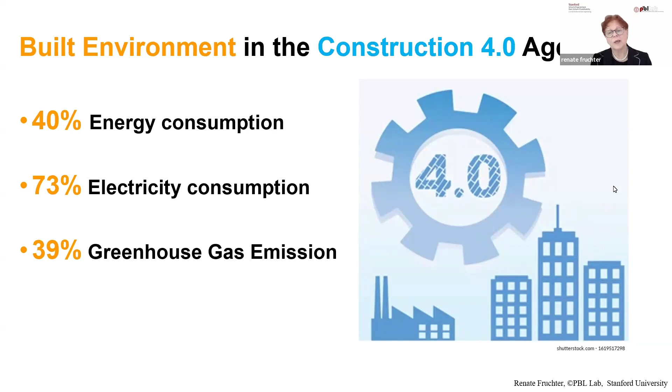Addressing in their projects the current climate emergency, coined Code Red for Humanity by the UN Secretary General, as well as reflect in their projects our AEC industry's responsibility to adopt innovative construction 4.0 processes, digitalization, industrialization, prefabrication, and new materials to build more sustainable buildings for current and future generations.

So, to address these challenges, students responded to this year's theme, Generative Minds for a Better World: AI, enhanced collaboration, and high-performance buildings.

These were supported by 3 specific competition topics. The 90s Sustainability Challenge focused on time and urgency to define their sustainability impact in a temporal dimension. The IPD Challenge focused on cultivating a team mindset in support of productivity in the age of construction 4.0, coined T-Mind. And last but not least, the Technology Challenge, inviting the students to connect the dots between innovative technologies, processes, and the buildings that people actually go to work and learn, focusing on sustainable, intelligent supply chain.

So this year, we gathered at this annual PBL event to listen to the 3 AEC Global student teams share their projects and team process, and discuss with industry mentors their solutions. So, without any further delay, Pacific team, the floor is yours. Okay.

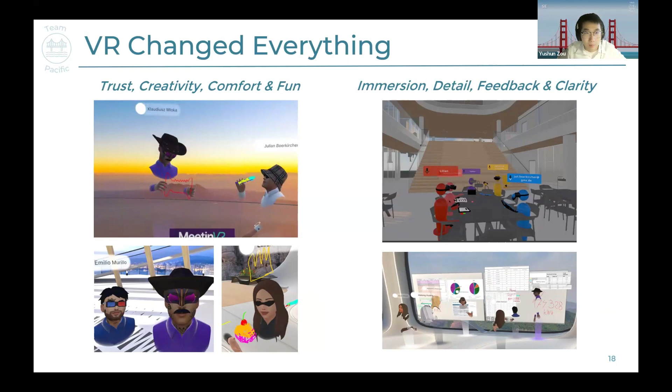At the same time, VR gave us shared spatial understanding. We weren't looking at disconnected screens, but we were inside the building together, catching issues early, testing ideas at full scale, and making decisions with clarity. VR didn't just help us see the project, it helped us see it as a team.

Now we come to our project goals, which are the key intentions that guided our approach right from the start. First, we want to reduce resource use and meet the sustainable target values across all relevant categories. And we aim to create a flexible and future adaptable building ready for changing needs and digital systems.

We also want to minimize our site footprint and maximize prefabrication to streamline the building process. And we intend to design a building that keeps operating costs low and remains resilient over time. And finally, we aim to deliver a space that supports well-being, daylight access, and intuitive, inclusive use.

Our challenges intersect in different ways, but at the center, they come together in a unified approach that is collaborative, tech-powered, and built for long-term impact.

For the IPD challenge, what is really holding our team back? In interdisciplinary projects, teams always face challenges that slow them down. Silos, delays, and poor coordination often block the path to smarter solutions. We have identified 4 major challenges that affect our team progress. To overcome them, we have set clear goals with well-designed approaches.

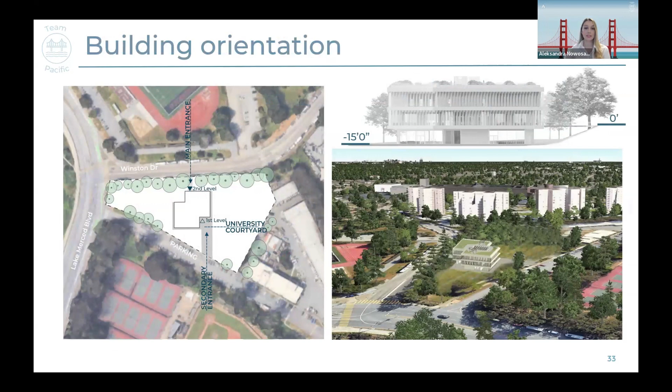The positioning of the building on our site was carefully chosen based on existing conditions, including both climate and topography. This placement creates a comfortable courtyard space for users and allows for dual access, a main entrance from Winston Drive and a secondary entrance from N State Drive and the adjacent parking area.

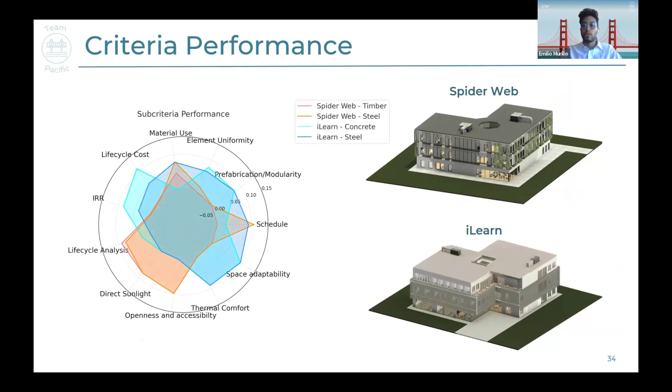The big idea you will see today didn't appear out of nowhere. We started with two different concepts, each with two different structural systems. We evaluated each of these alternatives to understand their performance in 11 different sub-criteria, and you are about to see the evolution of the one that narrowly beat the rest.

iLearn is more than just a name. It's a mindset. Every I behind it reflects what this building is built for. But all of this boils down to three core ideas that shape iLearn from the ground up: user-centered design, because the people in the building shape how it works and not the other way around; flexibility for the future, to create a structure that evolves with learning methods and not expires with them; and embedded intelligence, where technology isn't an add-on, but part of the system.

Our starting point was a moment of redefinition. When we thought about that word, the launch of the iPhone in 2007 came to our minds, not just for its technology, but for how it changed behavior. The idea of putting users first and embracing adaptability is what inspired us to create iLearn.

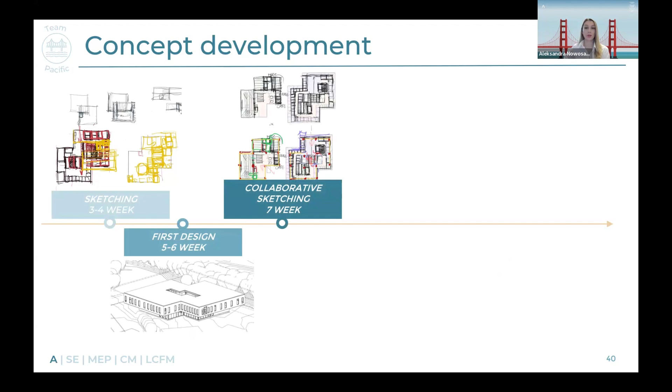We began exploring a double diamond footprint using sketches and focused deeply on user needs. Soon after, we presented our initial design and spent the following weeks developing it through cross-disciplinary collaboration. During the winter presentation, we committed to the iLearn concept. However, we felt the design didn't yet reflect the full potential of its name, so we undertook a complete redefinition, rethinking every element. And today, we're proud to present the true iLearn building.

We decided to indicate our crucial design values for the university building that reflects the iLearn big idea: interaction, collaboration, and creativity are the three assets that function together to increase the potential of its users, complementing each other and creating a space conducive to the development of users, human relations, and their well-being.

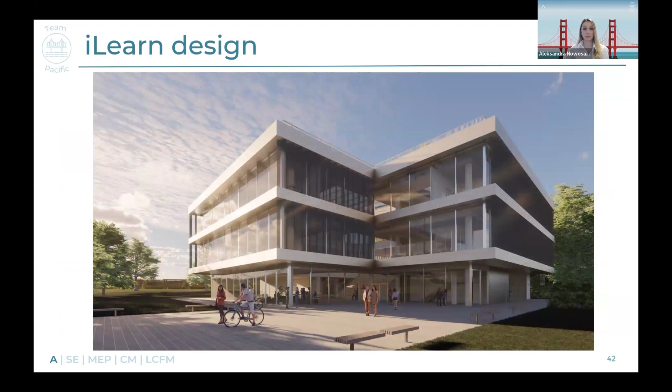The iLearn building is designed with a focus on simplicity and clarity, featuring glazed facades and smooth neutral cladding. Its open character is emphasized through a structural layout that enables adaptable spaces and spacious interiors, promoting flexibility of use.

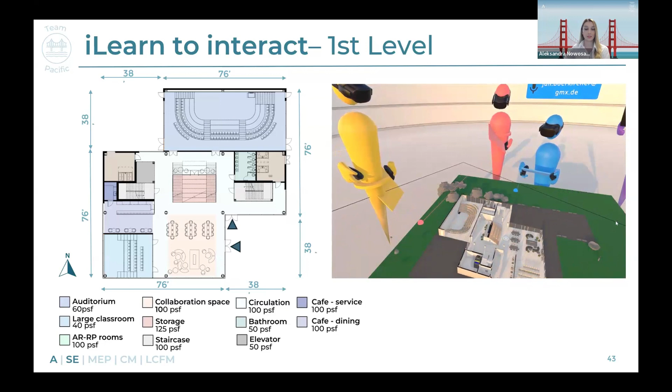We begin with the ground floor, which is designed to encourage interaction and connectivity. It offers comfortable leisure areas, creating an inviting environment for users to relax, socialize, and collaborate.

The specified load is the live load provided from the table in ASCE 7. From a perspective of structural efficiency, we collaborated with architecture to put higher live load areas around the columns.

The red rectangular box points out the location of retaining walls, which are covered around the excavation slope in both the big classroom and auditorium. The image at right shows the location of retaining walls in the context of the site.

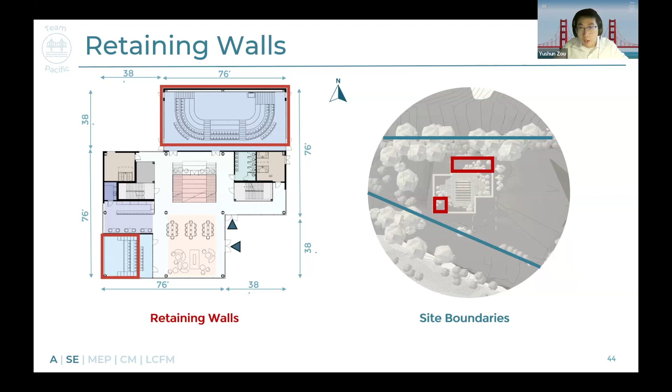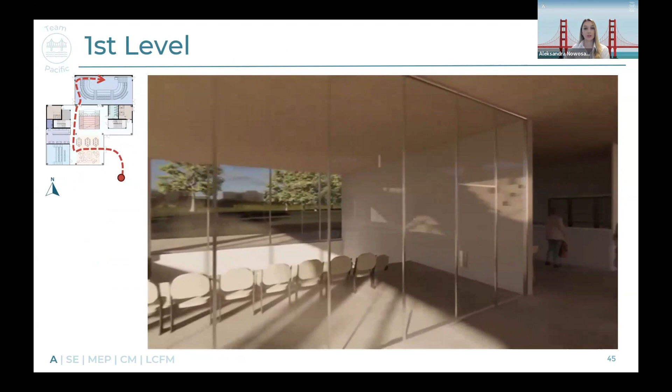We enter the first level from the courtyard, stepping directly into the heart of the building, a vibrant social hub centered around the main staircase, with a designated sitting area that encourages student collaboration. Straight ahead, there is a large glazed classroom with sloped seating and a cafe just nearby.

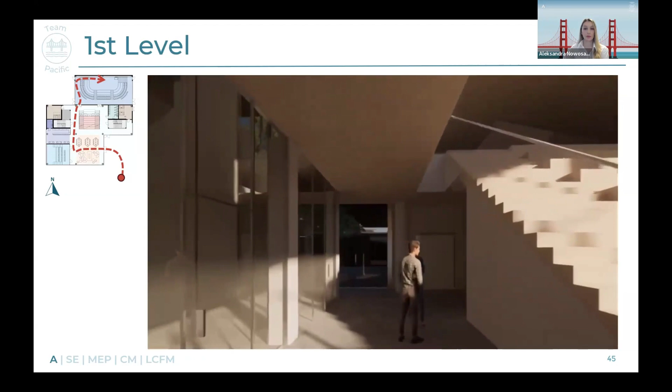As we move past the social area, we pass by the elevator on the left, and we move to the auditorium, designed with a curved audience layout and 4 exits to ensure smooth circulation and safety during emergencies.

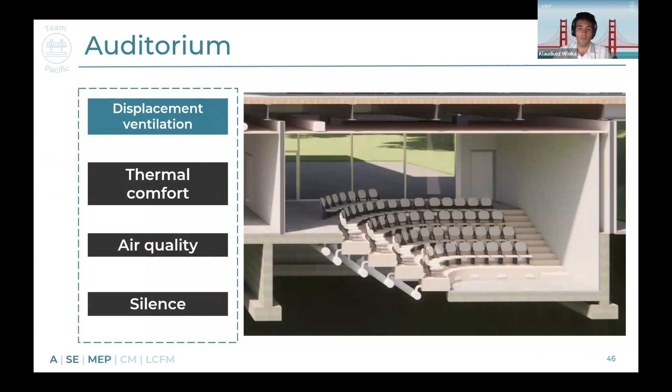The auditorium has a specific structure and performance needs. By using displacement ventilation, we ensure the best possible condition for users, making the space perfectly suited for its purpose.

Entering the second floor is designed to foster collaboration, offering diverse spaces and flexible learning environments that support the future of education. For the second and third floor, we put regions with low load like classroom and office around the cantilever part, which can help reduce overall element size.

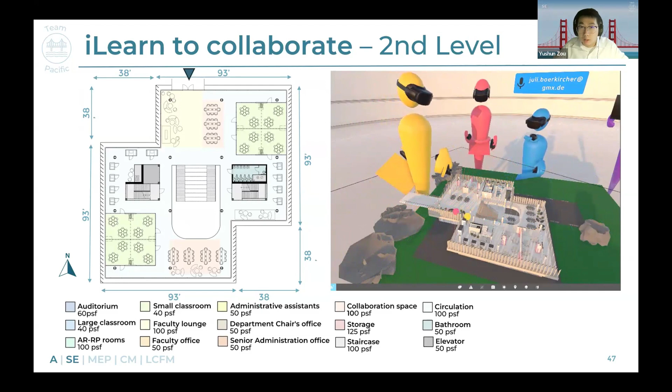Entering the second floor from the higher northern street, we arrive in a welcoming lunch area that connects to the collaborative spaces. To the left, there are classrooms, and as we move past, we reach the top of the main staircase. We're greeted by natural light and open views.

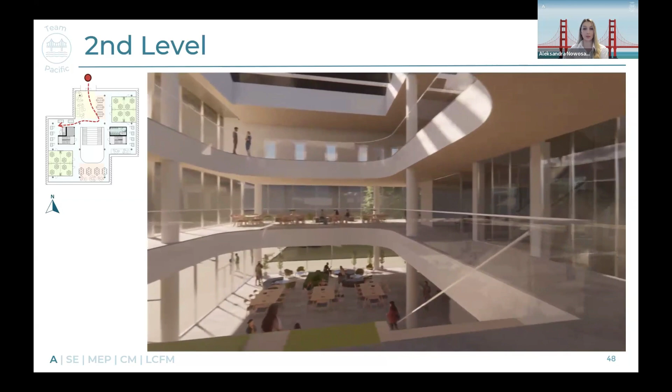Turning right, we reach the AI pods area, personalized spaces supporting individual learning. Inspired by modular meeting rooms, our AI pods offer pockets of privacy in a collaborative environment and come equipped with AI-driven screens and assistive touch.

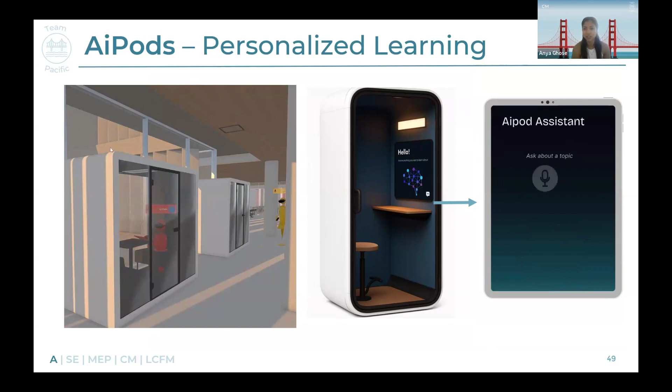Whether it's a foreign student looking to learn in their native language or someone diving deep into a discipline-specific topic, the AI delivers tailored content in real time. And with ambient lighting and customizable sound, it's not just smart, it's an experience. Personalized, private, and intuitive. You never want to leave.

Continuing our journey on the second floor, we pass the fully glazed staircase offering views across the building. We then arrive at the bright central atrium, where collaborative spaces open up to the right. Moving forward, we reach the second classroom, designed to reach various learning goals.

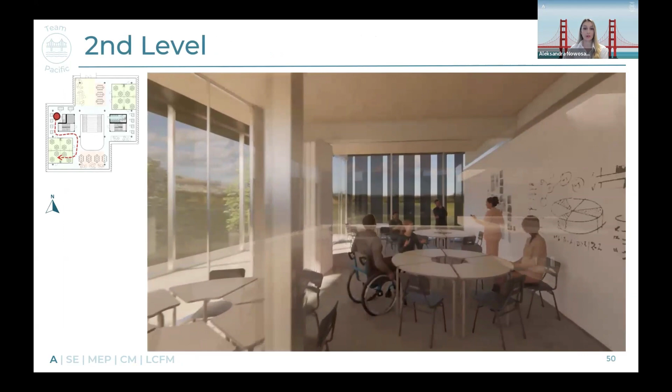Focusing on the flexibility of our spaces, we designed the classroom that can be adjusted to the user needs by changing its arrangement. One spacious classroom can be divided into two smaller ones or into 4 seminar rooms. All spaces allow for comfortable use due to the glazed partitions providing natural lighting, as well as separate entrances for all of the segments.

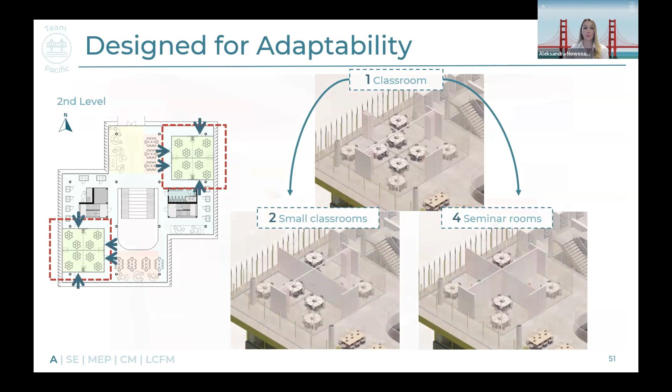By providing movable spaces, we allow users to decide on the organization of the educational building, basing on their current needs and learning goals.

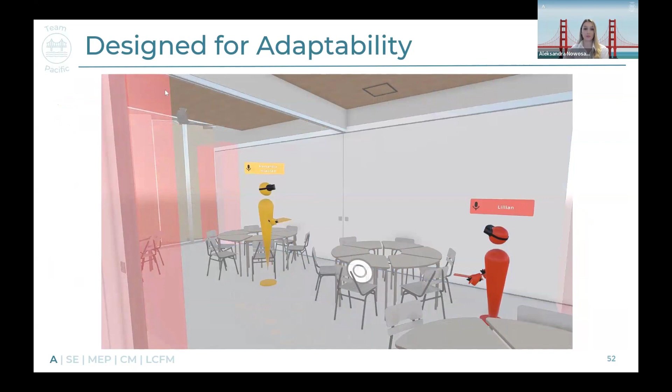Adaptability provides comfort which might be disturbed by noisy surroundings. To address this issue, we selected materials with excellent sound-reducing properties, acoustic glass for the glazed partitions, and MDF panels for soundproof ceilings. Ease of maintenance was another priority, leading us to choose high-performance wall paint that allows for bright, easy-to-clean surfaces. The color palette creates a cozy, calming atmosphere, serving as a perfect backdrop to university life.

The third floor supports creativity with fully equipped project rooms, as well as offices in the opposite part of the building that aren't tied up to any specific user group and can be adapted to changing needs.

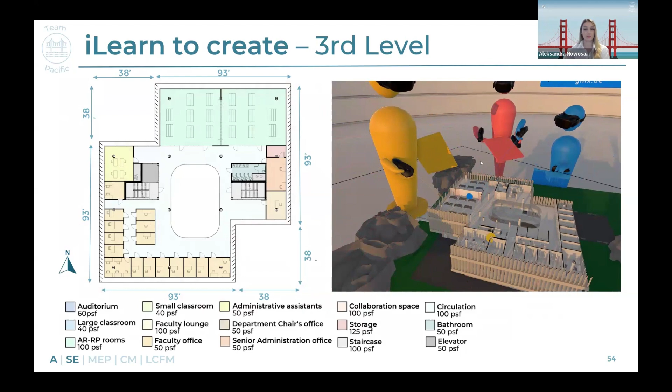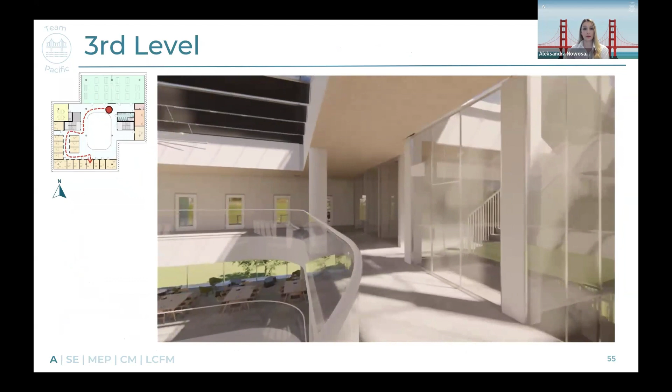We pass by the AR-RP rooms, spaces designed to bring student vision and creativity to life. Walking along the central atrium, we arrive at the offices, located along the eastern and southern wall.

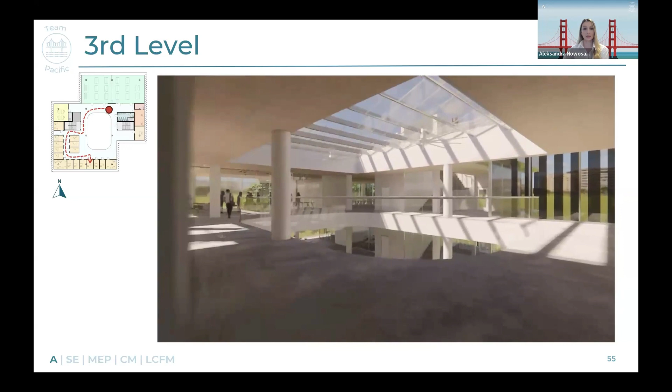As we move forward and turn left, we return to the atrium, once again immersed in the natural light streaming through the large skylight above, and we finish our trip in one of our offices.

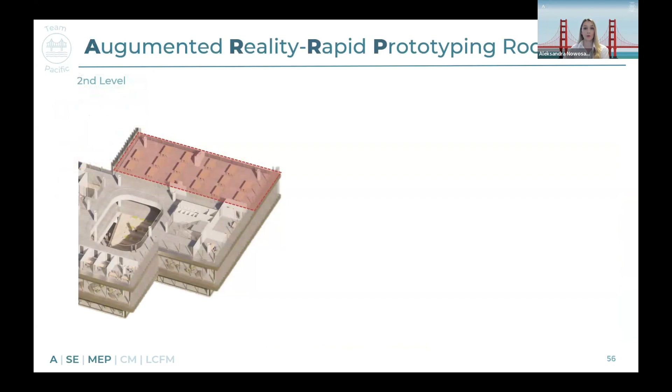We rebranded our instructional labs as augmented reality rapid prototyping rooms to highlight the importance of creativity, innovation, and future-focused learning. The space is designed to support every stage of development.

It begins with an area for brainstorming and sketching, followed by stations for digital prototyping, and at the center, a dedicated zone equipped for augmented reality.

These rooms also require a special ventilation approach, so we use operable windows, air exchange rates, and HEPA filters to ensure excellent air quality there.

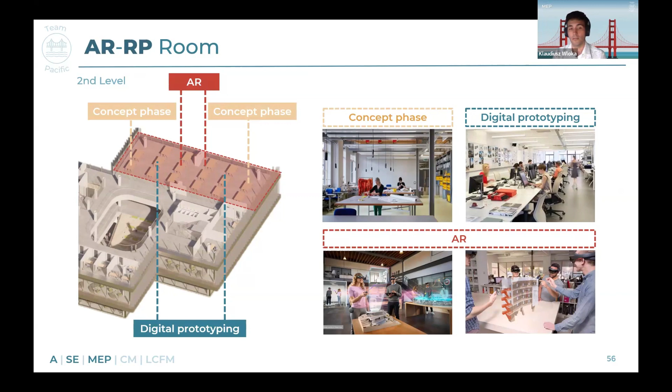And now that we've covered everything inside the building, we move to our final floor, the rooftop. Even though we designed a highly technical, smart building, we still wanted to create a space that reconnects people with nature, sort of a green oasis in the middle of the city.

Therefore, the rooftop is divided into several areas. One is the community garden, where fruits and vegetables can be grown together. Another is the biodiversity zone, with insect hotels and native plants, which is helping us to strengthen and restore the local ecosystem.

We also created a social area where students and faculty can relax, meet, or even host small events, turning the roof into a welcoming and engaging space.

Right next to it, we integrated hydro panels, which extract clean drinking water directly from air using solar energy, showcasing smart technology that provides a sustainable source of fresh water. This combination of spaces on the roof supports both environmental and social sustainability, making the roof a vibrant, functional, and nature-friendly extension of the building.

The community garden is not just a space for endorsing biodiversity, but a space for busy engineering students to come together in an outdoor community building space. By taking advantage of San Francisco's mild year-round climate, we're planting seasonal fruits and vegetables to create a roof-to-cafe system, serving the produce in-house and generating a revenue potential of $15,000 per annum. Our LCFM does love that.

As user-centered design is one of our main goals, we aim for providing smooth circulation throughout the building. Unfortunately, some problems did still appear.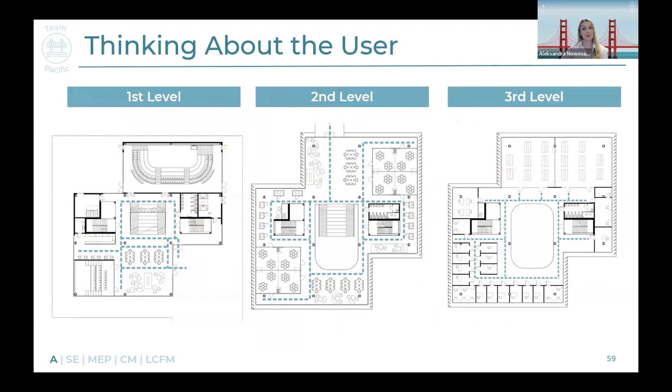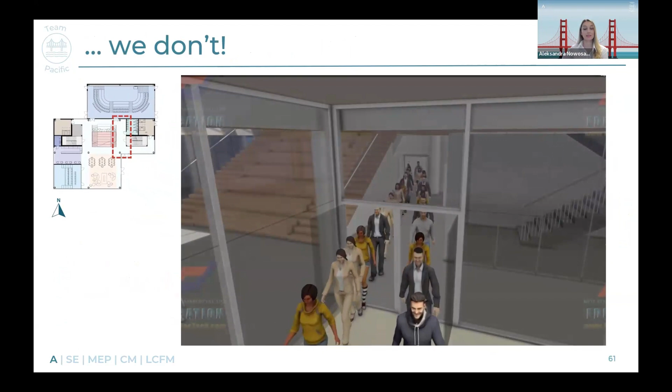The first issue emerged in the corridor running between the auditorium and the entrance from the courtyard. It seemed too narrow in case of an emergency. Luckily, we managed to analyze the issue by running a simulation in Pathfinder, and it came out that the space is wide enough in case of an emergency situation.

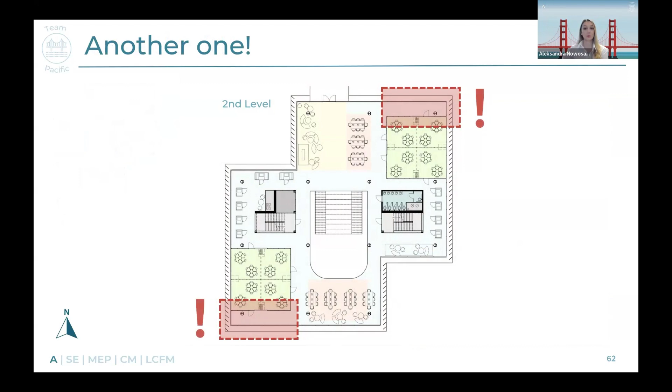The next problem was noticed in the corridors leading to the corner seminar rooms that are created when the movable partitions are closed. But also in this case, Pathfinder allowed us to simulate the problematic situation and make sure we provide a comfortable space for moving around.

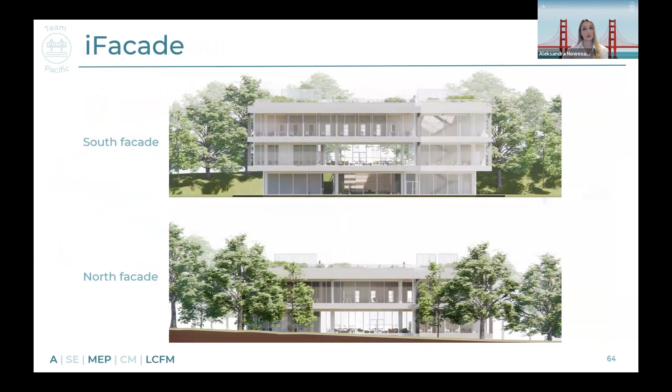We designed our north and south facade with large glazings, which provide light and create a seamless transition between the building's exterior and interior, enhancing the overall experience of openness and flow.

Glass buildings are a visual statement. They are truly stunning and give users a unique sense of openness, connection to the outside, and natural light. But they also come with challenges, like solar heat gains and the risk of glare.

To make our building comfortable and usable, we implemented a daylight control system combining low emission glass, which reduces incoming light and heat, with external shading that limits direct sunlight.

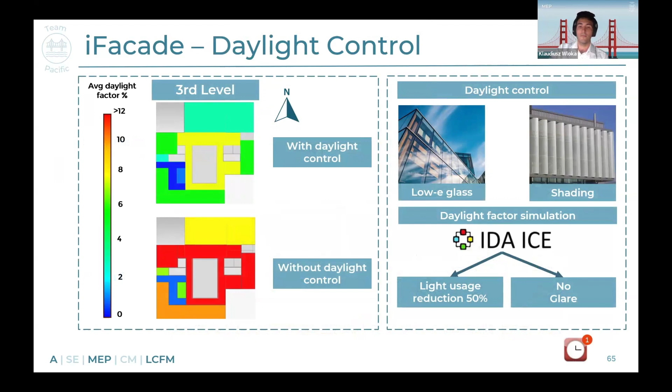With that much glass, it was clear that we needed external shading. So we ran a trade-off analysis between two facade options, a kinetic system and vertical shading fins. We ultimately chose the vertical shading fins because they come with lower and more predictable costs, a long lifespan, and they're corrosion resistant, which is especially important in San Francisco's foggy climate. Overall, they turned out to be the most cost-efficient and robust solution.

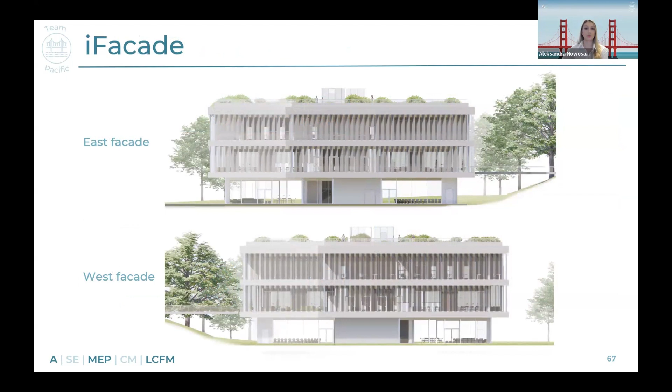All of our facades show the joint efforts of architect, MEP, and LCFM in providing an aesthetic look, as well as at the same time user comfort.

With such a large glass surface, cleaning costs became a major consideration for us. That's why we developed a fully automated system using cleaning robots, both for floors and facades. On top of that, we equipped our windows with a self-cleaning coating. Altogether, the setup allowed us to reduce cleaning costs by up to 60% compared to traditional methods.

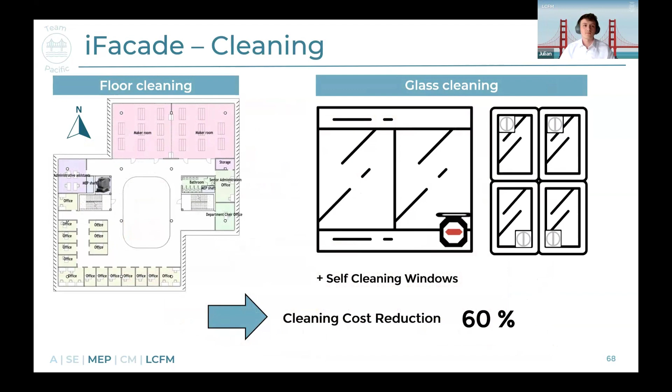Direct sunlight turned out to be a more complex problem than expected. So in addition to our previously mentioned shading strategies, we also added shading elements in the atrium. In the end, we created a space that feels open and welcoming while adapting to the natural circadian rhythm, with natural lighting that changes color based on outdoor conditions, working with the rhythm of the people inside.

We designed a natural ventilation system for the corridors using openable windows in the central atrium, which operates based on the stack effect to drive vertical airflow. Large HVLS fans support air movement throughout the building, while makerspaces are additionally operated by cross-ventilation.

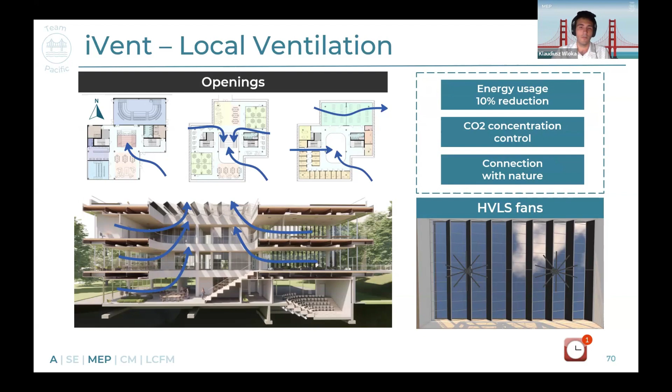The system is controlled by sensors that determine when natural ventilation is effective. This ensures energy usage reduction and improvement of user comfort.

Continuing with the fan strategy, we also use ceiling fans to reduce cooling energy use by 33% while improving the comfort of users inside. By combining the previously mentioned elements, we developed a hybrid ventilation system based on a VAV setup with air handling units equipped with heat recovery and integrated air source heat pumps, providing both heating and cooling. To ensure high indoor air quality, the system is also equipped with HEPA filters. This solution balances energy efficiency, comfort, and health.

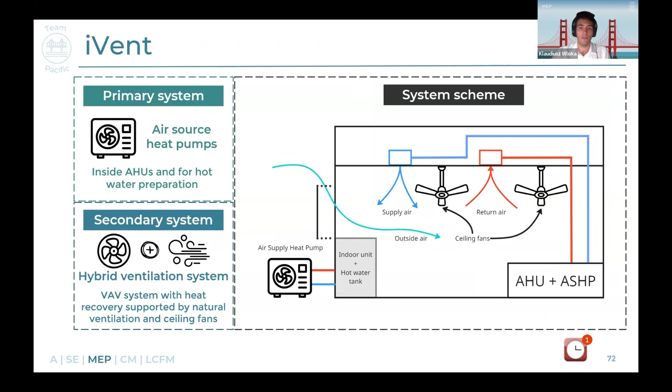The ventilation system was designed to adapt to flexible classroom layouts, ensuring comfort regardless of interior changes. We also provided targeted airflow to the areas with the AI pods, and by dividing the system into two zones, we reduced the duct sizes without interfering with the structural design.

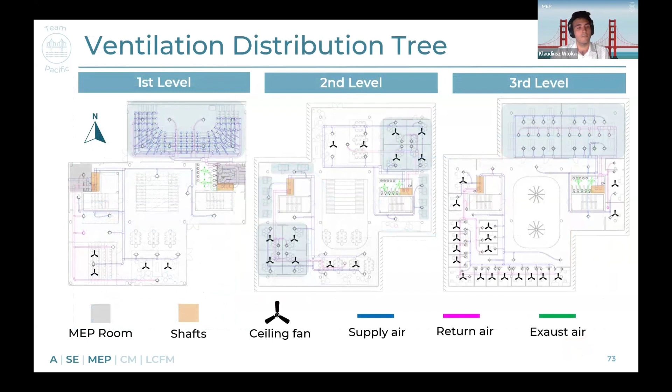To support adaptability of the rest of the floor plan, we have designed a large modular structural grid of 38 feet, which gives us maximum flexibility for different layouts and uses.

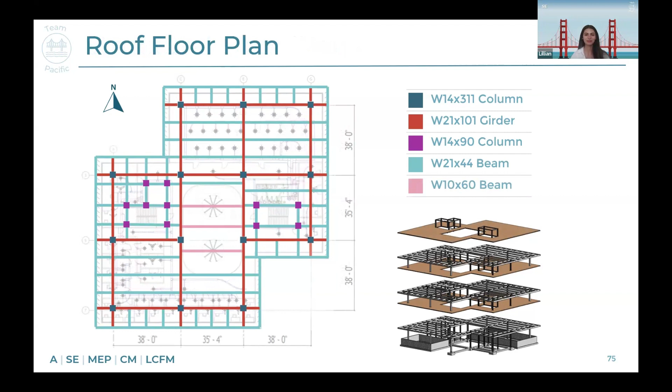In terms of gravity load path, the loads are transferred from each floor to girders and through the columns down to the foundation and the ground.

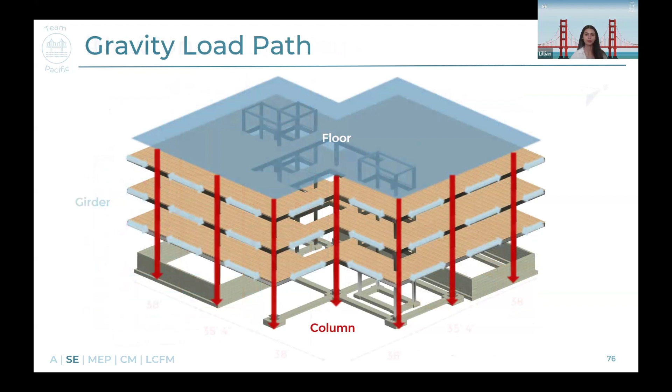Now, through collaboration with the team, we decided to use steel as our frame material so that we could have these long spans that give us openness and adaptability with small cantilevers. Steel was also a good choice for us in terms of prefabrication and the construction schedule. Its high strength to weight ratio also meant that we could work with slimmer sections, leaving good space for MEP and architecture.

So we were able to achieve a comfortable floor to ceiling height of 11 feet 2 inches, with MEP being 1 foot 4 and the structure being 2 foot 6.

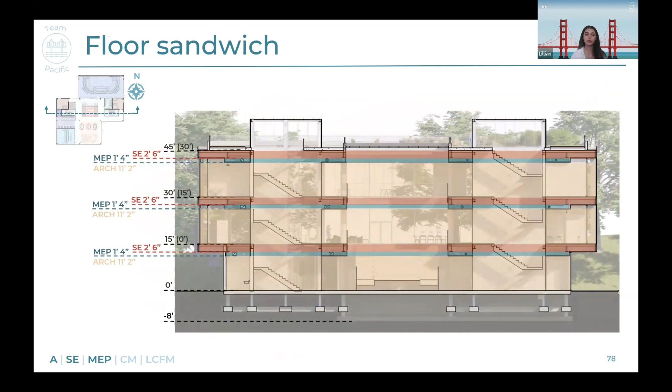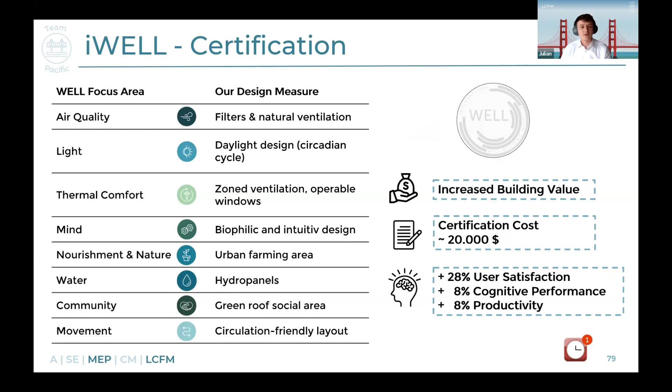Now, to make all of these intangible aspects of comfort and well-being that our design team worked hard on measurable, we decided to go for the WELL certification. It captures the impact of features like our circulation-friendly layout, fresh air systems, daylight optimization, and even the urban farming. These contribute to better health, higher user satisfaction, and ultimately add value to our building.

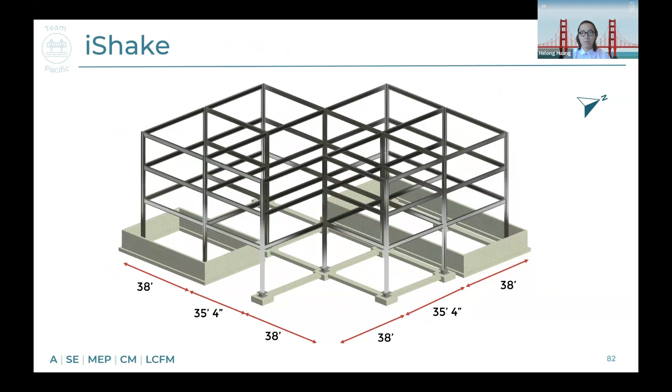Here's our foundation system. We use big concrete rectangular footings on the large columns and smaller footings on the small columns, which were set around 2 cores. All foundation beams are 36 by 18 inches concrete rectangular beams.

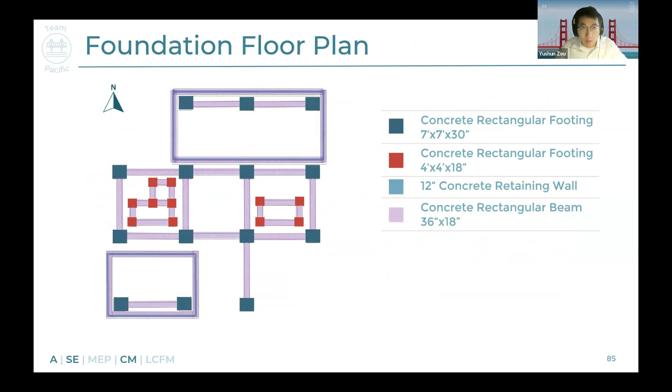Using bolted web-welded flange for beam-to-beam connections can reduce field welding, which can reduce labor costs and communication issues due to weather or access.

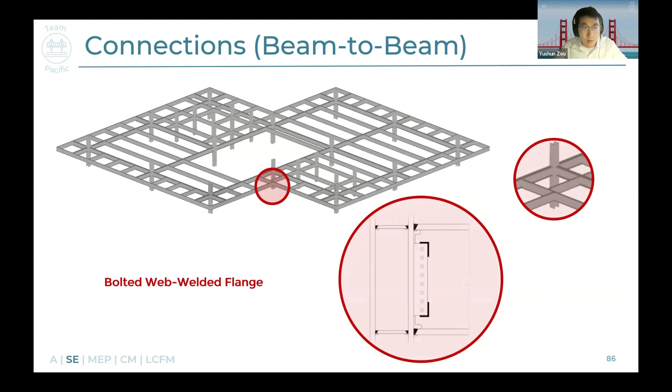After the earthquake, the seismic force only makes the fuse yield, without cost for repairing beams and columns during the life cycle.

Here are the first three modes of response of the structural system, which are translation in the x-axis and y-axis respectively for the first and second modes, and torsion for the third mode. This is a good sign for a well-balanced lateral force resisting system. The maximum inter-story drift ratio is about 1.5%, which is smaller than the requirement of 2% specified in the code. Both measurements show the effectiveness of the designed lateral system of the building.

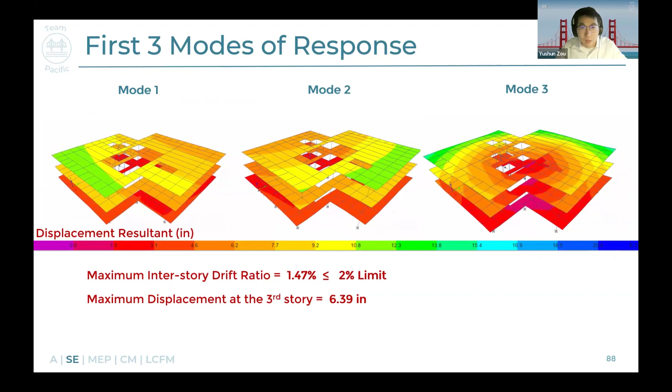Now let's see how we developed our own disruptive AI solutions to fulfill the approach for our team mindset. Having identified design feedback latency and lack of understandability created by the silos, we created a multi-agent system to handle quantity takeoffs, cost estimation, and target checking. With insights from the team about our information needs and requirements, we broke down the process into smaller tasks that single agents can handle by coordinating with each other.

These agents were given a variety of tools and capabilities to fulfill their role in the system, including data processing tools, information retrieval abilities, and memory management. For example, one step in the cost estimation process is scanning for new items that haven't been seen in previous design iterations and matching them to items from a cost database built with RS Means. Beyond just a tool for automation, this system is flexible, can self-correct when running into errors, and makes the workflow very explainable to other disciplines not acquainted with these processes.

Just to show a demo of what we're working with, we first make a request to the system using natural language. For example, we can say, hey, could you please perform a quantity takeoff cost estimation and check the targets for the latest BIM models?

Following this, the system will process these files to produce quantity takeoffs and cost estimates in an observable way, where we can verify and check their work. Here, we become checkers rather than doers, and the whole process becomes understandable and accessible to all disciplines.

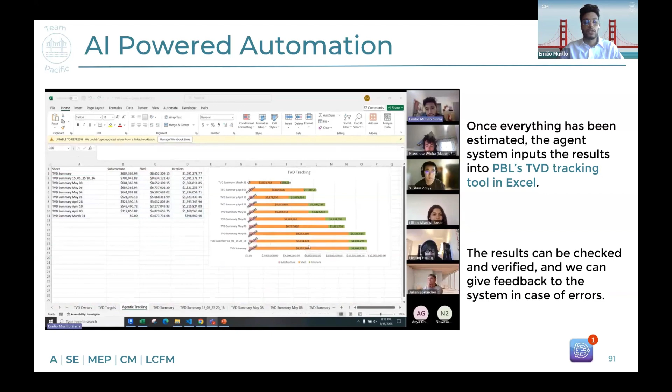The system has already helped us a lot in making the tracking of target values and new iterations smoother and easier to understand. The frequency of how often we get feedback on our design went from once a week per milestone to now anytime we want.

Now looking at how our other TVD clusters look at the end, we can see that our two biggest target exceedances in the substructure and shell are compensated for in savings on services and specialty construction, thanks to our team's efforts.

Now, to zoom in on one of the agents who has stolen the show when testing the tool with our team, it is the iInsights agent who observes the process when we run a design iteration through the system and remembers it for later. This becomes very powerful as it compounds over time, where the agent's knowledge base gets bigger and bigger. Now we have essentially an AI assistant that can expertly remember everything there is to know about our design.

We tested how accurate and reliable this agent's knowledge of our system is, and we were blown away by the level of detail with which it knows our entire design evolution.

We were interested to know how the green roof has impacted our design and targets, and we were very surprised by the insights it was able to give us about our own design. Based on its internal knowledge, this agent can create detailed answers in the style of a report, helping us understand and track decisions, and it can also cater its answers to our domain of expertise.

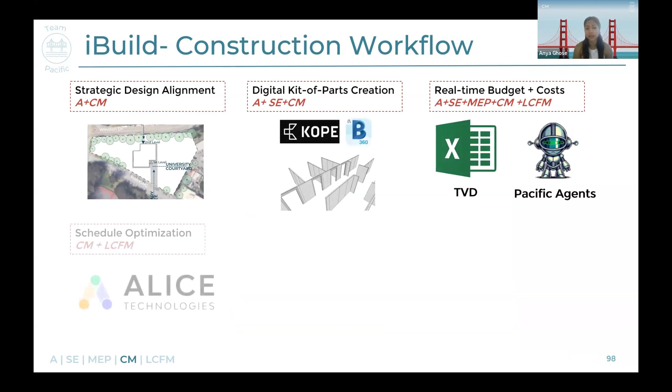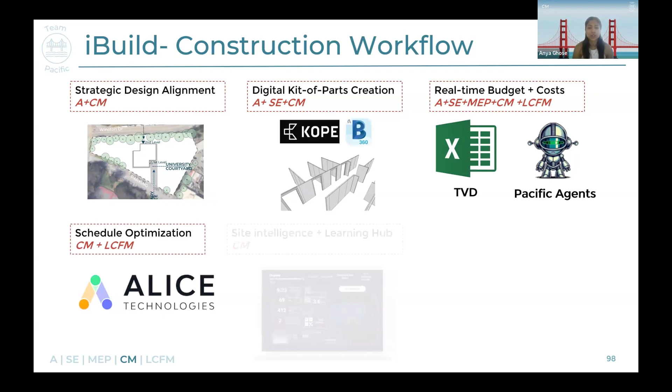After that, we plan to track our materials in real time using Manufacton and our newly designed and proposed iSupply dashboard. On site, we have used Fuser as well as Alice and VR for traffic logistics simulations and serving an educational purpose. We optimized our schedule using Alice and minimized our site footprint using electrical equipment and robotics.

Together, this creates an integrated, intelligent, and impactful system.

Starting our exploration of prefab options with KOPE, we fitted Latticube interior partitions to our building, since their ability to be demounted aligns strongly with our team's desire for flexible spaces. This is when we realized our team's efforts to keep large floor-to-ceiling heights would not allow this, as 10-foot partitions is the tallest they produce.

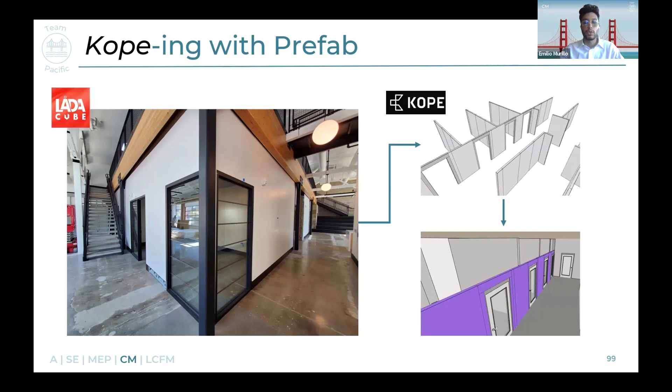The design team noted that acoustic privacy would be a concern if we left this gap, and filling it with some other material might defeat the purpose of being easily demountable. Therefore, we used Kope's internal partition benchmark to fit standard light gauge steel and drywall partitions. We used optimization to minimize the number of panel types and non-buildable panels, using panel dimensions as the variables.

Running through 40 iterations, we landed at 74 panels of 41 different types, all of which were sent back to Revit. We also decided to use Kope for fitting the geometry of our exterior glazed panels.

We started out in Revit, where the curtain walls are modeled as a single element, and we brought them into Kope, where we used an existing product library which had similar dimensions to the architect's intended panel size. Then we fitted these panels, landing at 162 panels with 16 unique dimensions. The panelized curtain walls were then sent back to Revit.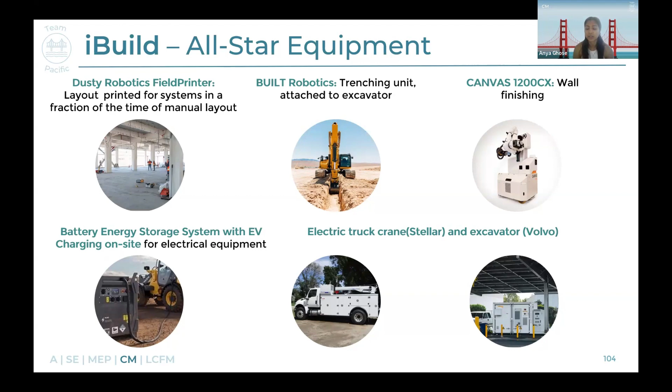We're using an all-star equipment cast, using all electric and robotics to reduce rework and increase efficiency. Having an on-site EV charging and renewable energy system will allow us to boost sustainability and also give us additional incentive of up to $100,000 from SF utilities.

We used Alice to optimize our construction schedule. With the use of built robotics attachment, we found a significant reduction in substructures, which is our bottleneck. Next, the race was to complete the shell as quickly as possible to minimize emissions and noise, which Alice proposed be done by starting exterior walls while the next floor frame is going up.

After having prepared all these components in KOPE for our kit of parts and scheduled from Alice, we can now add them to the rest of our kit of parts and move on to track the production and shipping to the site using Manufacton.

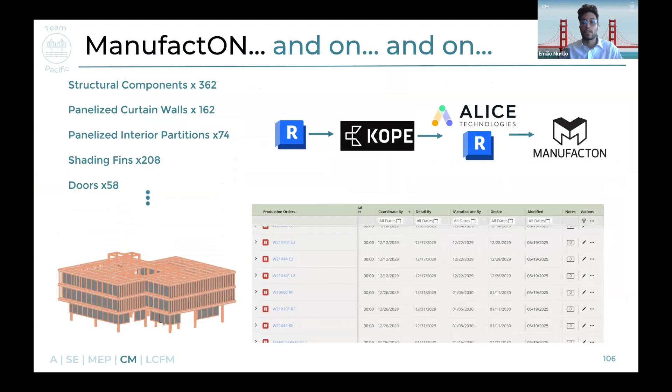We partnered with Recology San Francisco to track and log construction waste in real time, helping us divert materials away from landfills and recycle up to 70% of our site waste by using a QR code tracking system.

We started with a base estimate of 240 tons of construction waste. By reducing our site footprint by 30%, we brought that down to 170. Next, incorporating prefabrication further cut it down to 100 tons, a 58% overall reduction from the original estimate.

Throughout our partnership, we were able to divert or recycle, with our projections from Recology, 69 tons of waste, with only 25 to 30 tons of waste being projected to be sent to landfills. It's a smart, measurable, and mission-driven system, helping us build more efficiently while supporting SF's zero waste goals.

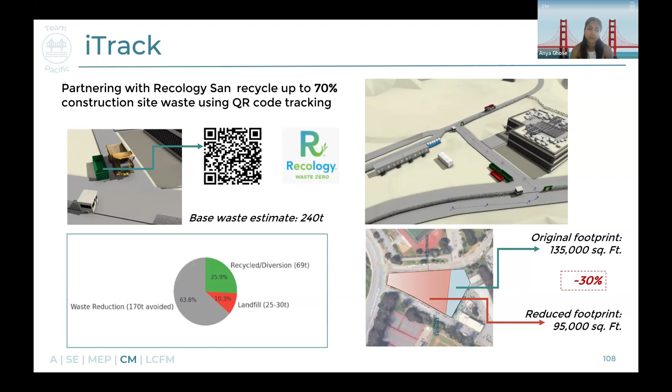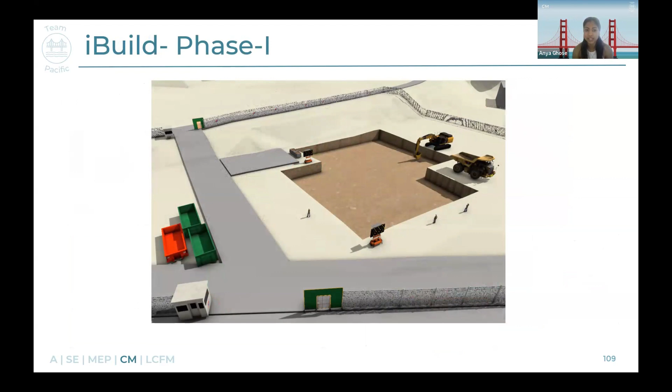Phase 1 of the construction is about excavation. Using our built robotics attachment on the excavator, we reduce crew on site for this phase, and the laydown area is used for shoring.

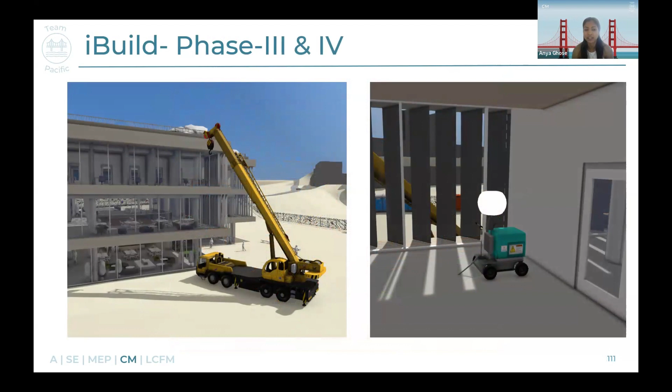Phases 3 and 4 are about shell completion and then the interior finishing placements. The picture on the right is a representation of Dusty making a layout and being inspected, easily maneuverable and fits inside.

After discussing with LCFM, we decided to implement sensors for structural health monitoring, recording ground motions, structural element deformations, and building inclines. Also, considering MEP needs and construction environmental impacts, we also want to install sensors for indoor temperature, construction emission, and noise.

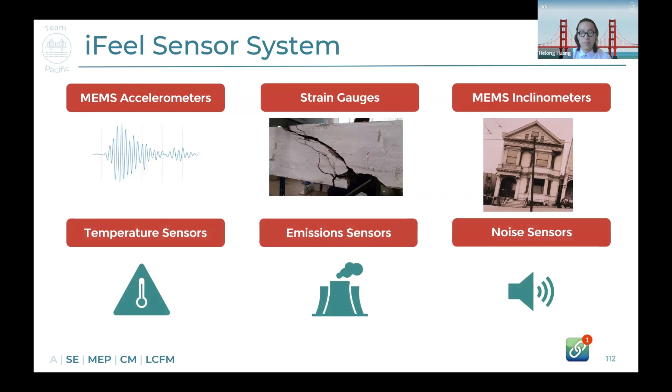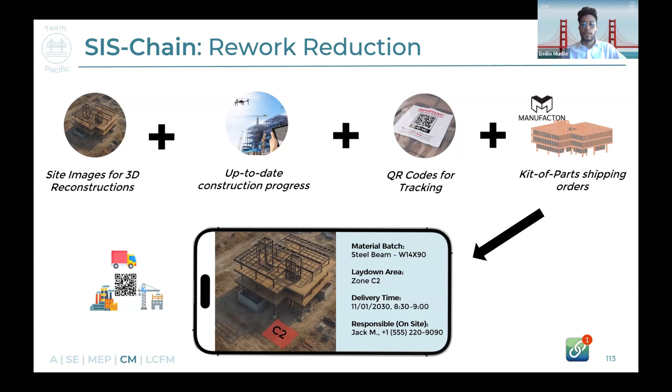As part of our rework reduction approach for the tech challenge, we propose integrating all media captured on site and using it for creating point cloud reconstructions of the as-built state, contributing to tracking construction progress. Then, with a QR code system building upon the existing functionality of Manufacton, we can integrate all this information into shipping orders to ensure drivers have everything needed to deliver materials directly to the correct pick point on site, reducing the rework that comes with deliveries to the wrong spot.

Now we're moving on to sustainability and finances, starting with the energy system. Originally we planned to generate our own power using PV panels and wind turbines, but after running the numbers, we saw that by 2030 San Francisco will supply 100% green grid power, and that completely changed our approach. Switching to the grid allowed us to reduce CO2 emissions by 86%, lower our lifecycle energy costs by 25%, and most importantly, freed up the entire roof for our unique green design concept.

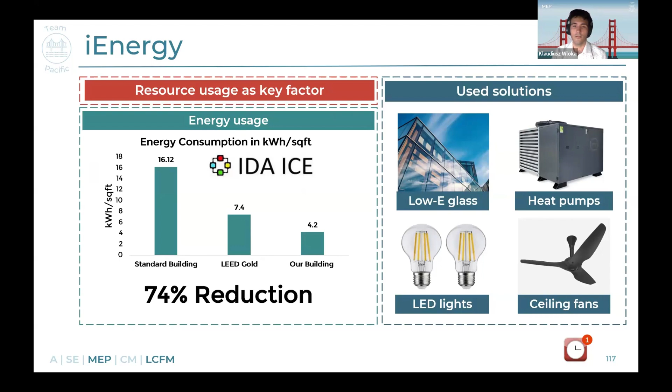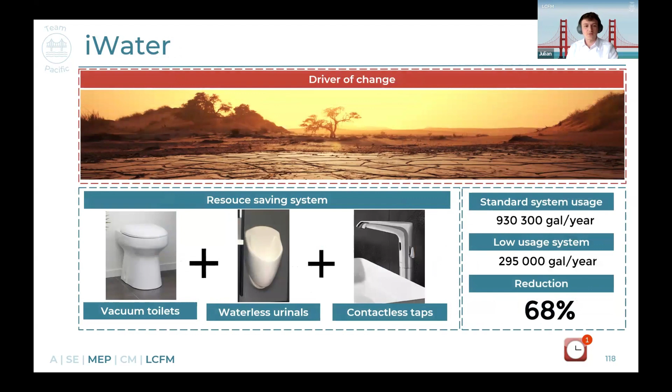In a region facing frequent droughts, a green roof might seem like an irrational choice. But with our iWater system, we created a closed water loop using purple water, which fully covers the irrigation demand without using any additional fresh water.

To make the impact of our sustainability measures more tangible, especially in terms of CO2 emissions, we wanted to explore the potential financial value. That's why we ran a calculation based on future carbon pricing. California plans to include the building sector in its emission trading system for 2029. This projection helps us show that our emission reductions don't benefit the environment only - they could also contribute to the building's economic performance over time.

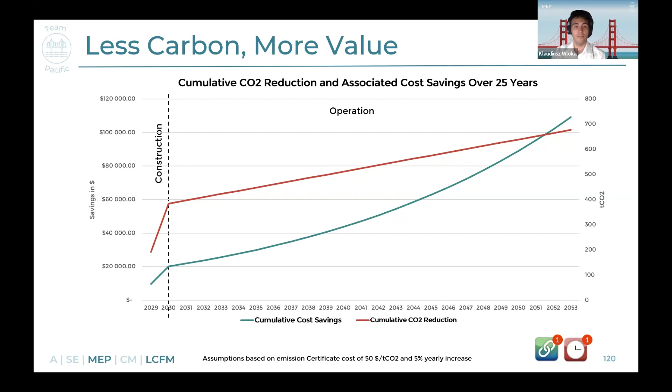To give our sustainability efforts a measurable benchmark, we pursued LEED certification and went through the entire scorecard. We achieved 86 out of 110 points, enough to reach LEED Platinum. That not only certifies our environmental performance but also adds long-term value. Studies have shown that with LEED certification, property value can increase by up to 7%, making it a smart move both ecologically and financially.

To address the topic of risk, we conducted a sensitivity analysis for our key financial variables. We evaluated how changes in interest rate, construction costs, operational expenditures, and additional income would affect our IRR, our central performance indicator, and based on that created a best and worst case scenario. The result is, even in the worst case, our project remains profitable, and in the best case we see strong upside potential. To manage those risks, we implemented specific measures: we fixed the interest rate for 15 years, used a conservative forecast for additional income, and added a 2% risk buffer to strengthen our resilience.

Now we're moving on to our lifecycle costs. Over the full 25-year project span, our total lifecycle costs amount to roughly $42 million. This includes construction, operational and capital expenditures, and a category labeled here as specialties, which covers specific items like certification costs or the cleaning robots. On top of that, we also calculated roughly $14 million in interest, which is not part of the LCC but still crucial for the overall financial picture.

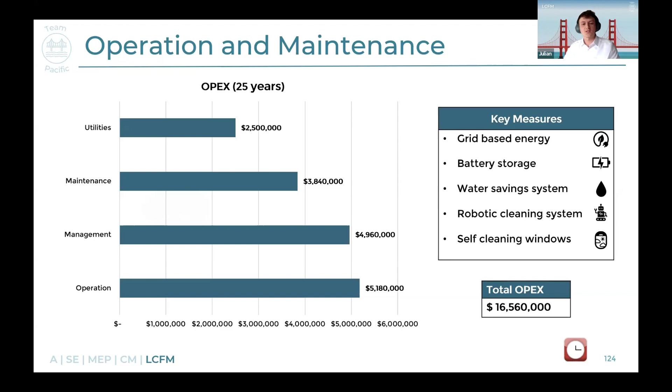So the next logical question is, when does our project actually start paying back? We reach our break-even point in the year 2049, and from then on, the building generates a financial surplus year over year. This marks a major milestone in the project's financial trajectory.

To sum it up, our project stands on solid financial ground. We've achieved a strong IRR of 9.2%, exceeding the 7% benchmark. Key cover ratios like debt service and loan life remain consistently above the required thresholds, confirming our financial resilience over the 25 years. Altogether, this reflects a financially viable and future-proof investment.

But of course, alongside our financial targets, we set ourselves ambitious sustainability goals, because achieving strong financial results was only half the mission. The next step is about our sustainability targets.

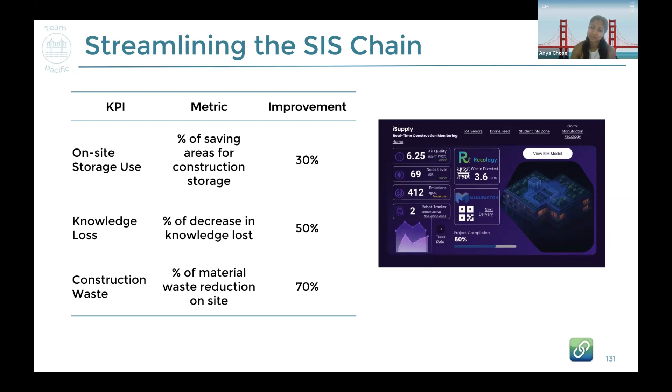To wrap up our sustainable challenge, from the very beginning we knew this project had to be more than just a building. We aimed to bring together the economic, ecological, and social dimensions of sustainability, not as separate goals, but as one shared responsibility. By connecting the dots through a sustainable intelligent chain, reducing environmental impact during construction, implementing systems that lower water and energy usage, creating spaces that work for the users, and zones that give back to the environment, we designed a building that doesn't just stand in response to Code Red for humanity, it acts on it from now.

Before we wrap up, here's what we learned about the project, the process, and each other. Some takeaways are thoughtful and some are silly, but together they tell a story of how we grew as a team, learning, failing, laughing, and figuring it out all along the way.